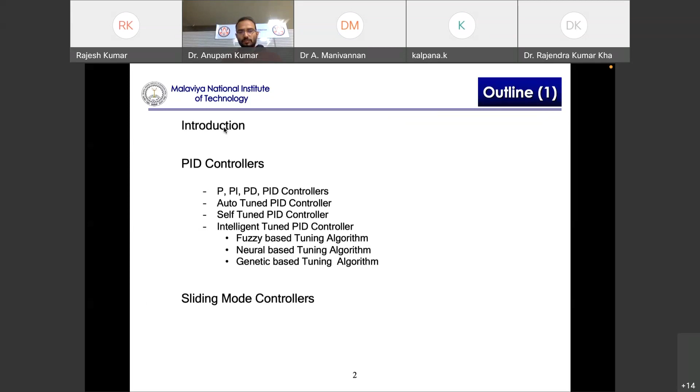Then another class is known as sliding mode controller—a small discussion on that, what control laws are and how it works. And then we discuss in detail about fuzzy controllers.

We talk about the structure of fuzzy controllers, fuzzy PI-PD, PID-like controllers, adaptive fuzzy controllers, and the main factors important when designing fuzzy controllers, like scaling factors and membership functions. If you have membership functions, we subcategorize them into symmetrical or unsymmetrical membership functions.

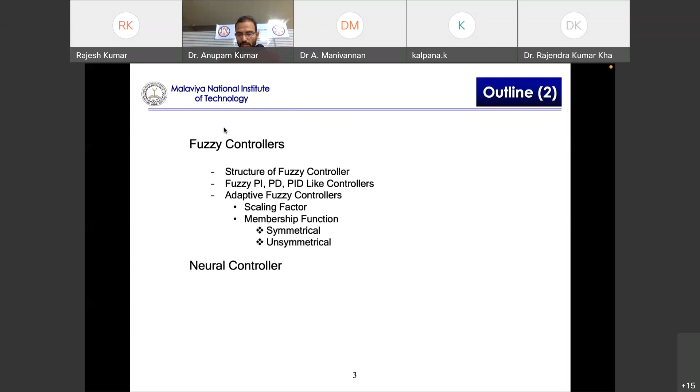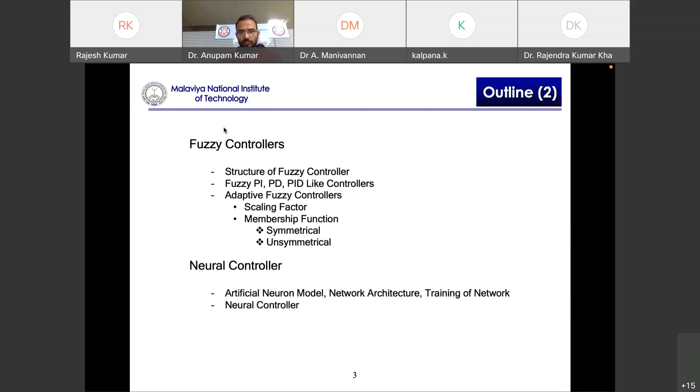Then we will discuss neural controllers, what they are, and most of you are aware of it, but just to check, how we can use ANN or ANN architectures for control purposes. We'll discuss neural controllers, online neural controllers, or offline neural controllers.

And then some advancements where we are mixing the two controllers—mixing the properties of fuzzy and neuro.

Each one is having its own kind of advantage and disadvantage. So if we mix them, if we combine them, can we compensate the disadvantage of one by adding the second type of controller? So there we talk about, we'll try to understand fuzzy neuron, what it is, what is neurofuzzy, and what's the difference if I switch these two terms, fuzzy neuro or neurofuzzy, how does it make a difference in the controller.

Then adaptive neurofuzzy system controller, again we'll discuss about symmetrical and unsymmetrical controllers there. And then at the end we'll see how, if you develop any controller, you can check the performance of these controllers, like which one is good. So if you want to claim that you have developed a certain kind of controller for a certain application and your controller is better, how can you put it on record that your controller is better, what are those parameters.

So we'll talk about transient and steady state analysis with different conditions, and then finally we conclude over these controllers. So this is the flow of today's presentation.

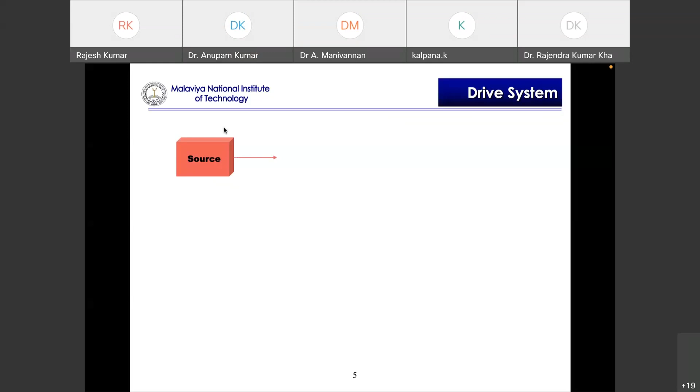So we need a source to power it up. The source is basically an uncontrolled kind of source, like we have some constant source there. Then we need a power modulator which modulates our source according to our requirement. Say maybe your source is DC, but I need AC, so it converts DC to AC, or likewise.

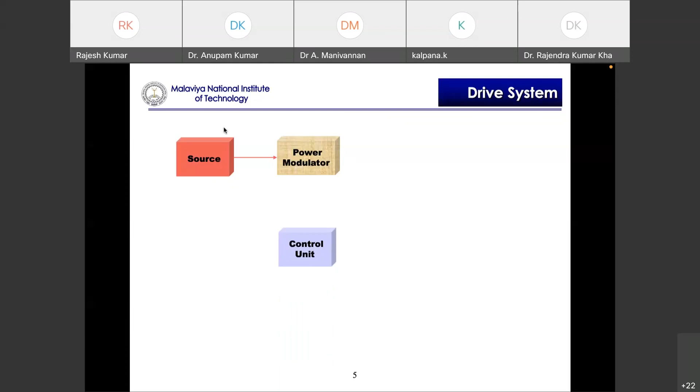And since you are using a power modulator, you need a control unit. So the control unit basically controls that modulator, the processing of it. And here comes the controllers. The controllers are part of this control unit. So we give a reference trajectory that says, okay, this is what I want from my system.

Maybe if it is a robotic problem, I'll give that reference signal or reference trajectory that the angle at that instant should be 30 degrees. So that reference signal goes to the control unit. The control unit, based upon this reference signal and feedback, generates some signal. That signal moves to the power modulator, which modulates the power, and that modulated power moves to the motor, and the motor then rotates according to that.

And we have a feedback mechanism. We sense it and give a feedback to my control signal, so the control signal always works on the feedback system, feedback mechanism. So control system always works on the feedback. It will have a feedback from the system, how the system is behaving.

It can be any process. This one is one kind of application, but it can be of any process, maybe any industry process, and most of these processes are control processes, closed loop control processes. So this one is the feedback, and this one is the reference signal, and here is the controller. So the job of the controller is to force the whole process according to our requirement, according to our desired outputs. That is the job of this particular section.

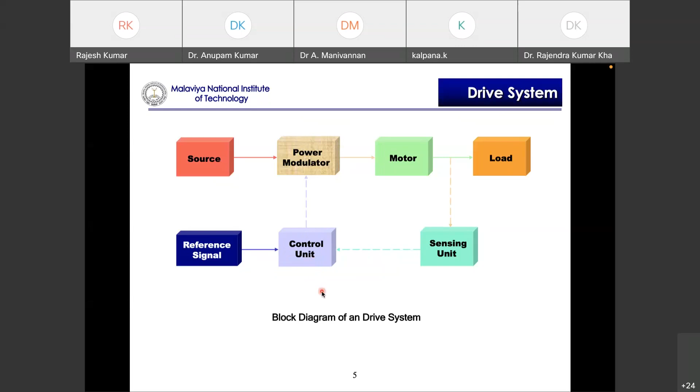So this one is a diagram of any drive system, maybe as I told you, electric drive or mechatronic drive system or robotic drive system or something like that. So when we are talking about today's topic, our focus will be on this part. Let me highlight it. So our focus is on this part, that is the control unit, because most of the other things are physical structures which are there. So we need to develop a certain kind of unit here which controls the whole process.

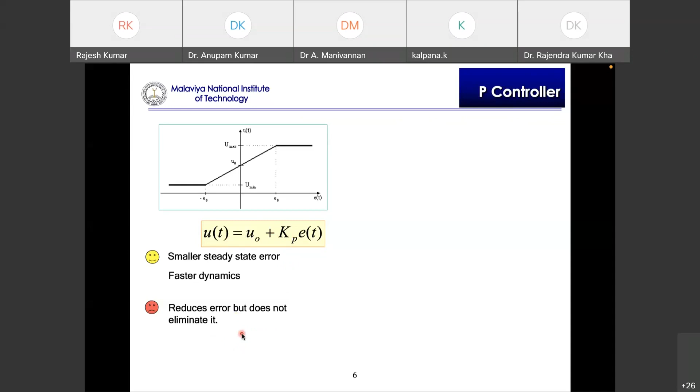So this is just to justify that theory. I have simulated these things, and if you see the graphs, the desired value is 1. That means I want to rotate my motor with an angle of 1 degree, or if you're looking at motion, I want to run my machine at 1 pu, per unit scale. 1 pu is basically, say, a maximum of 1000 rpm, something like that. So you can see the response of the system.

So if KP is 2, you can see there is a large gap in the steady state operation. Say at 2.5 there is a large gap. I want 1, but it is settling somewhere around 0.65 or something. But as you keep increasing your KP, you can see that this error keeps reducing. That is what we have in our comment box also: if you increase the KP it reduces, but you cannot eliminate it. So this is the first basic type of controller from where people started.

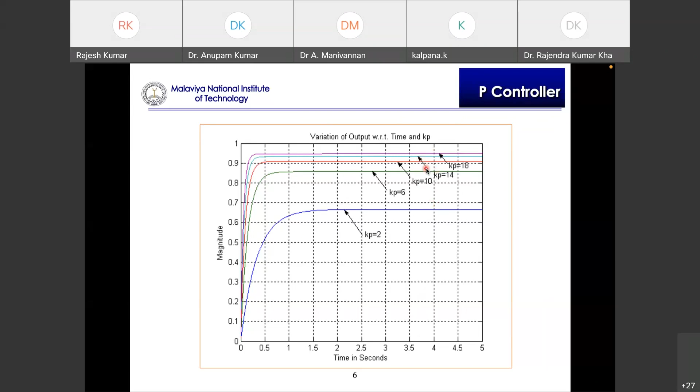This is pure mathematics, and those mathematical things are programmed in a nice manner. The next one is the PI controller. So I controller is basically an integral controller. You can see the equation is now modified. There is one term, E of t, which is already there in proportional, plus another term being added here. What we are doing here is taking the integral of error. Now I have two terms: one is Kp into Et, this is the P controller, and another is Kp by Ti into the integral term, this is known as integral. When you combine these two, that makes the PI controller. Now you are integrating the errors, and based upon those you are generating the output.

If you do so, this is control system analysis, where we can talk about stabilizing and destabilizing effects and the transfer function. That's not a major agenda here, but let's check how it is working and what are the advantages and disadvantages. The advantage is that now your steady state error can be 0, because you have added the integral term to it.

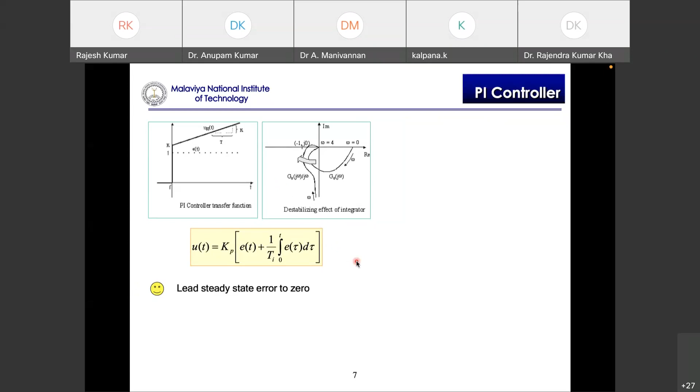Earlier controller was suffering from steady state error—you cannot eliminate it. But here you can eliminate the error. And then the negative point is basically stability. So these are control system approaches.

You can check it: your graph is moving towards -1 plus j0, and then we have a destabilizing effect. And obviously, this one is creating an issue over stability. I'll show you on the graph how we can judge and comment on this if we have graphs in front of us.

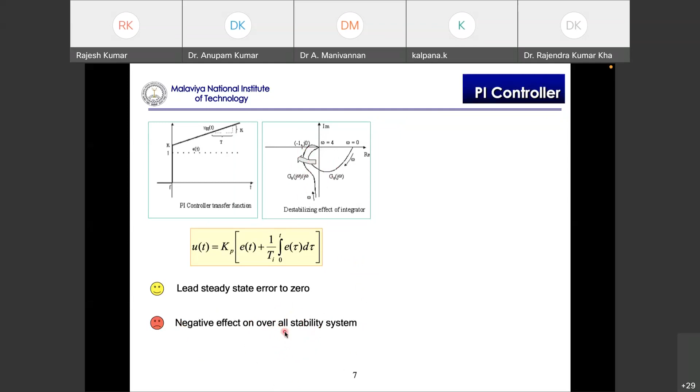Anyway, it is going and trying to reach to 1, but it will take a lot of time to reach. In general, or in practical, we don't want our system to respond so slowly.

It's like, okay, if I am working on a robot which is being used to operate a patient in a hospital, what I want is as soon as I give a command that, okay, rotate 30 degrees, it goes to 30 degrees and then performs the operation. We never want that robot to take 10 to 20 minutes to reach 30 degrees and then perform it. Then the patient will be in danger and all those things will be there.

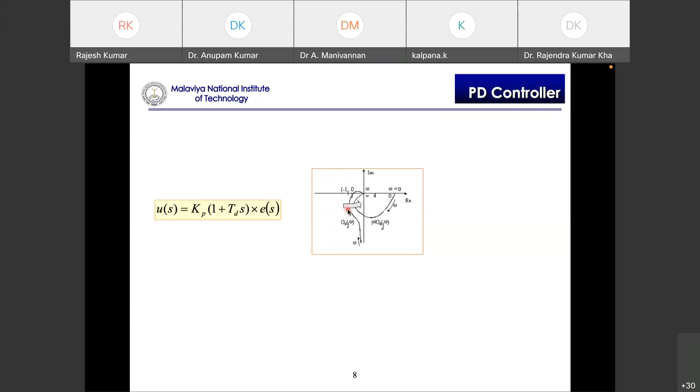So this is the output, and if you use it, you can see it is the reverse of the earlier one. Earlier it had a destabilizing effect; this one has a stabilizing effect. So this one is good. What is good here is it avoids sudden change in the error signal, and it improves the stability of the system.

PI moves towards the destabilizing zone. PD improves the stability of the system. Okay, and then...

The issue with this one is because the derivative means the change in the signal—derivative means xn minus xn minus 1, and that is being added to the system. So if there is noise in the system, it amplifies the noise. That is a big issue with this type of controller.

So each controller has some advantage and disadvantage, and also it cannot eliminate the error. It can reduce it, but it cannot eliminate the error.

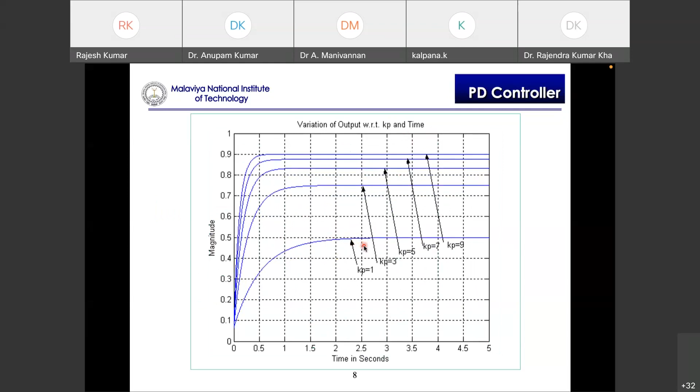So these are the various graphs that can be achieved when KD is fixed and KP is varied. We need to see the impact of fixing one parameter and changing another. KD means KP into TD, and KP itself is KP. So what is the impact on the performance if I fix that one and vary the KD?

So the change occurs in the transient part. This is my transient part, and this is steady state. If you see the steady state, n minus 1 is 0, so there is no effect here basically. Derivative term here is 0 because it's a constant kind of line.

So I now have three things with me: P, PI, and PD. P is okay, it's very fast, but steady state error cannot be 0. PI is a good one, it makes steady state error 0, but it introduces stability issues. PD is okay, it amplifies the noise, but it stabilizes the thing. So each one has advantage and disadvantage.

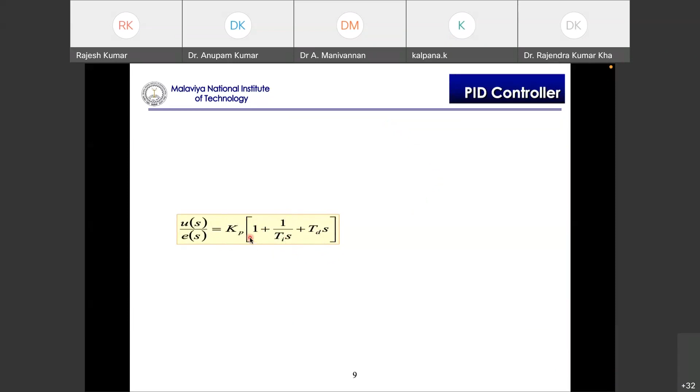Now each one has something good, something bad. You can make combinations of these three values, KP, KI, KD, to achieve it. Because if you increase KI, your oscillations increase, so we don't want oscillations.

Oscillations mean, okay, I give a command to my robot to move 30 degrees, and what happens is it moves and then starts oscillating around 30 degrees, somewhere going 31 to 29 and keeps on oscillating, which is not required. I want it to go to 30 degrees and remain at 30 degrees.

So if I give a certain command and my tuning is not proper, what are the issues? One issue can be that it moves and never reaches 30 degrees, settling somewhere around 28 - it moves very fast but never reaches there. That is basically your first part, your KP is good so it moves fast but never reaches there.

Then when KI is also introduced, it reaches 30 degrees but starts oscillating between 31 and 29. Then you can tune your KD in such a way that you can reduce the oscillation. So changing these values of KP, KI and KD is known as the tuning of the parameters.

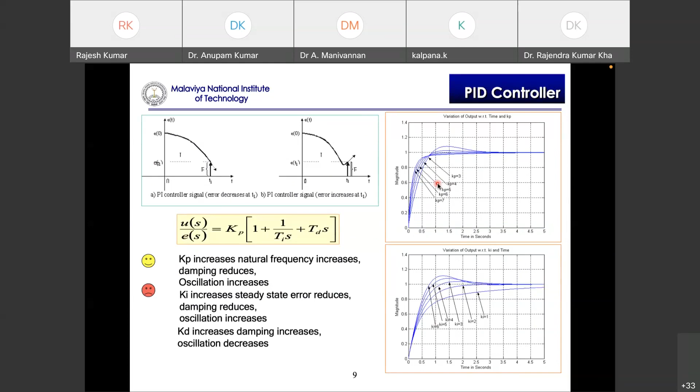KP is simply KP, KI is KP by TI, and KD is KP into TD. So how to get it? Getting the best values of KP, KI and KD for the performance of your system is known as tuning of parameters. So these are the parameters of a controller, conventional PID controller.

So this one is one method which is the classical method, an old one. What people do is they use the Ziegler-Nichols closed loop method. In this method, they take any system and oscillate the system. From there, they calculate the period of oscillation and ultimate gain.

And from there, they try to calculate the parameters of PID if you're using PID, PI, or P. But this is not a good idea, in the sense that if I'm using a controller in a big huge process, or say in a robot, nobody allows me to oscillate the system. So how to do these jobs there?

Another issue is that with time, my parameters are changing. If the parameters of the system are changing, obviously the transfer function is changing, and then I need to do some oscillations again to calculate these parameters and all this. So there are many other issues related to this one.

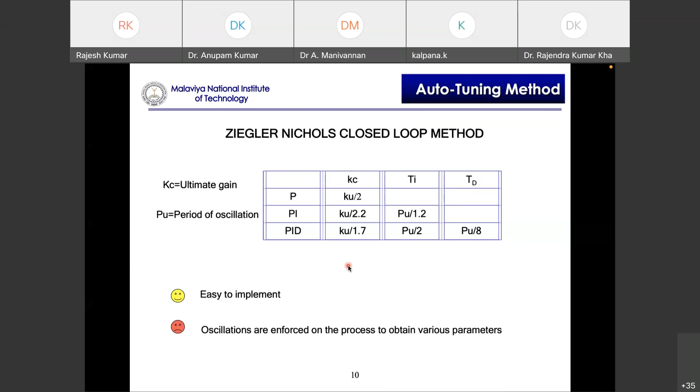This is very easy to implement, but you need to force oscillations on the system, and that creates a problem. So people thought, why not develop an algorithm so we can make it self-tuning instead of giving oscillations.

So self-tuning is one way. They change your KP, KI and KD by some mathematical relation. I measure error from here, I measure the performance of PID from here, and these two inputs I pass to the algorithm, which calculates KP, KI and KD, and those values can be given to the plant.

So in one sense we get rid of assuming or getting the values of KP, KI, KD. But now they depend on other parameters, which you can see here, alpha and beta. So again, to get the optimal value, we need to tune these parameters - what should be the value of alpha and beta.

But the working of this algorithm - here alpha and beta are also functions of time, they are also changing. So when we work with this type of system, this is online self-tuning. There's no need to do oscillations and all that stuff.

It works automatically. Error is coming from here, performance output of PID is coming from here. Those things come here, and then they can be used to find out the values of PID.

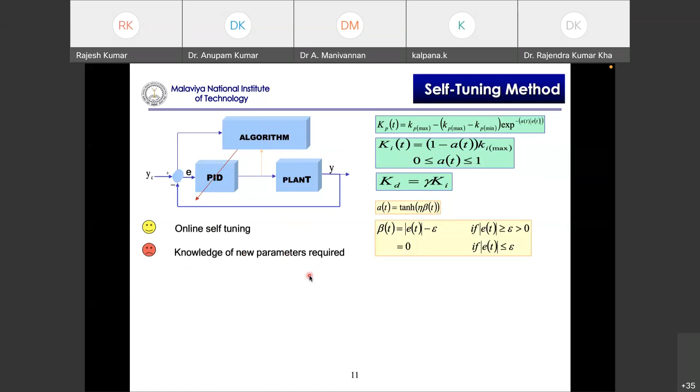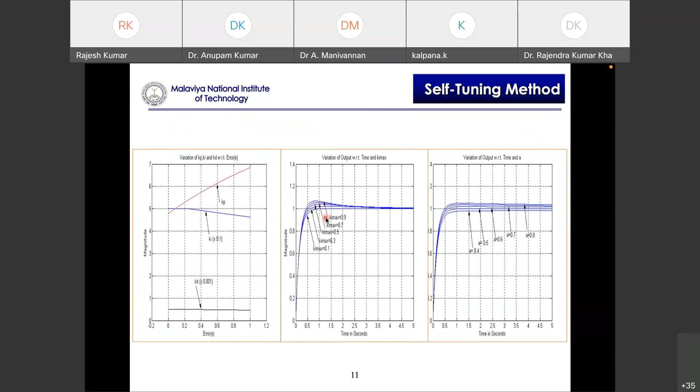But now again, a new thing appears - we have new terms, like alpha here, beta here, efficiency requirements. So we need knowledge of new parameters, which is sometimes a difficult task. And these are the performance of those self-tuning PID controllers - not very interesting or impressive, but in some cases it works fine.

Then people thought, instead of using that mathematical algorithm, can we use a fuzzy algorithm here? What fuzzy is, I'll explain in later slides, but just understand how it can be used here. They take the inputs as error, pass it to the fuzzy environment, and this fuzzy environment generates output signals. Those signals are used to tune the parameters of PID.

This is not a fuzzy controller. Here we are using a fuzzy method, inference system, fuzzy calculation or fuzzy set theory to tune the parameters of PID.

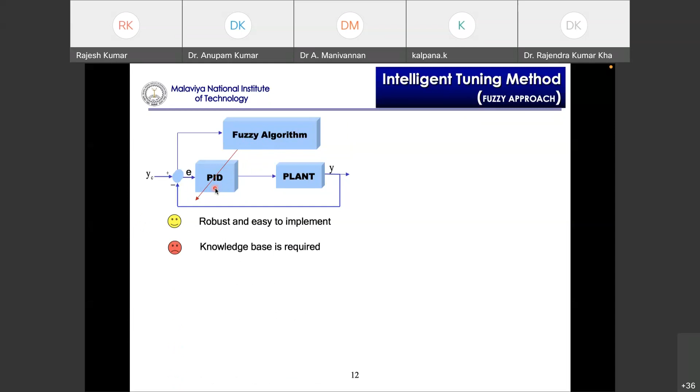It is robust and easy to implement, but there is a drawback - a knowledge base is required, which is one of the major requirements when developing any fuzzy algorithm. But the performance is very good.

So every instant they get the value of error and change in error. Based upon that, the fuzzy algorithm is generating the value of KP, KI, and KD, and those values are then being used to control the plant.

If you try to plot the values, you can see error and change in error, and this is KP, this is KI and KD. You can see that they are moving very fast - this is the variation in KP, KI and KD, and this variation comes in real time.

We are getting the input, calculating the error and change in error, and it's moving to the fuzzy system, and at every instant it is generating certain outputs - three outputs, KP, KI, and KD - and they are given to the system. So this is intelligent tuning of your controller.

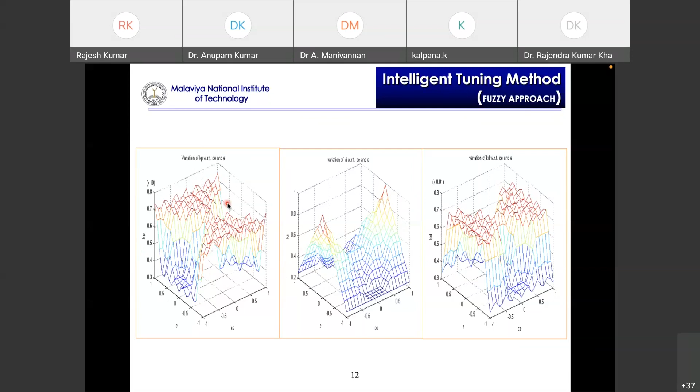So another one, we are just keep on checking what are the working and procedures of various controllers. Another one is we can use neural algorithm to tune the parameter.

So for neural, you can see here now there is some change. We are taking the input, what is desired, and we are taking what we are getting, and then we are using neural algorithm to tune the parameters of PID. Now there is a difference between this and the earlier approach.

In fuzzy, we take the error and change in error as inputs, and it generates a certain output. Now in neural algorithm, the errors are what is desired and what the system is getting. We try to map how better y can be same as yc, and then to do that we try to find out the parameters of PID.

What is the advantage of using such type of approach? The advantage is we can accommodate poorly modeled systems. If my system is poorly modeled, and if it is nonlinear, a dynamic system, we can use the power of neural network, which is basically approximations and all those things which we are already aware of. So that power is being used here. So if my system is poorly modeled and dynamic in nature, this type of tuning works fine.

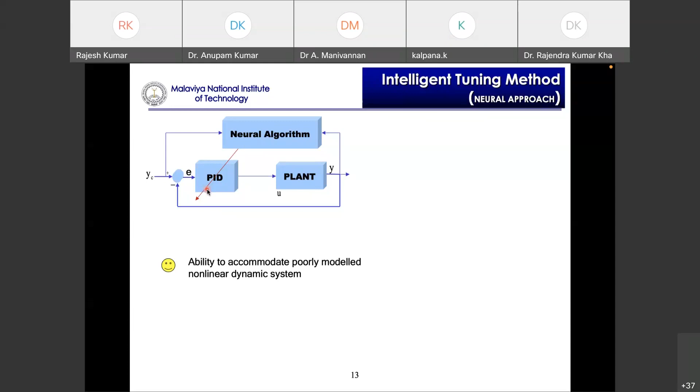But if you want to do the tuning, you need input output data pattern. So either you have a pattern of that system already which is being used, or you need to see how to get that pattern so that I can train my neural network.

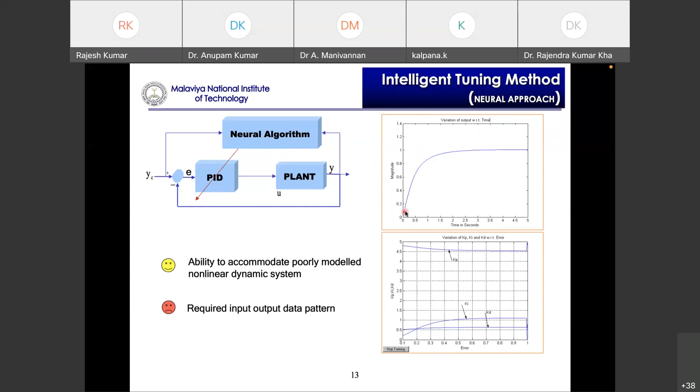So this one is the performance of the system. Again, it is settling at 1, very good, and the response is okay. This curve depends upon the data which we have received. We have simulated it, and we have synthetic data, and on the basis of that we try to train it and then use it. If my data is much better, then a better performance curve can be achieved from there.

The third one is just giving an idea, that is basically a genetic approach. So here, this opens another class of intelligence, which is inspired from nature or species. So we can say meta-heuristic algorithms, or bio-inspired algorithms, or nature-inspired algorithms. So these are the optimization algorithms.

So here what we are doing is making some change in the structure. And what is the change? The change is that I take some parameter of my controller performance as my objective function, and then I try to achieve that objective function, either maximizing something or minimizing something, by varying certain variables.

So variables are known to me, in the sense that I know the variables, but the exact values are not known to me. The objective function can be anything, like minimize the steady state error can be an objective function. Another objective function is minimize your peak. Another objective function is increase the stability of the system.

So there can be any kind of objective function, and to achieve that objective function, we can use classical optimization approach. But if we consider my system is highly nonlinear and dynamic, then classical approach fails there. And then people suggested why not go for meta-heuristic or similar kind of approaches. So this one is one of them.

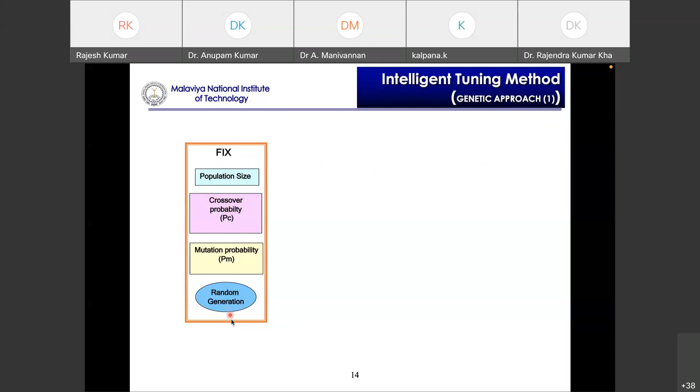So in genetic algorithm, in a simple way, we fix a few things: how much is my population, what is the crossover probability, what is the mutation probability, and we generate the random array, generate the population. And once we have this with us, then we do the encoding part. We have the fitness function, and we have these three operations: mating pool, crossover, and mutation. And then we decode it.

So the process goes like this: we fix these things, we encode the parameters, we calculate the fitness function, we perform these operators, and it keeps on running till a certain level of accuracy is achieved, and then finally we decode it, and that is passed to the controller. So controller values are there.

So this is the whole flow, and this remains the same, meaning you just change this approach. Instead of fixing population size, crossover, or mutation, you can fix population size, and then C1, C2.

and omega. Rest things work here, and in the operators we can have the updation of velocity, and then decode it. So this will be tuning using the PSO approach.

In another case, you can fix the number of wolves, and then fix the parameters A1 and A2 and C1, and these operators update the position. Then it will be PID tuning using GWO.

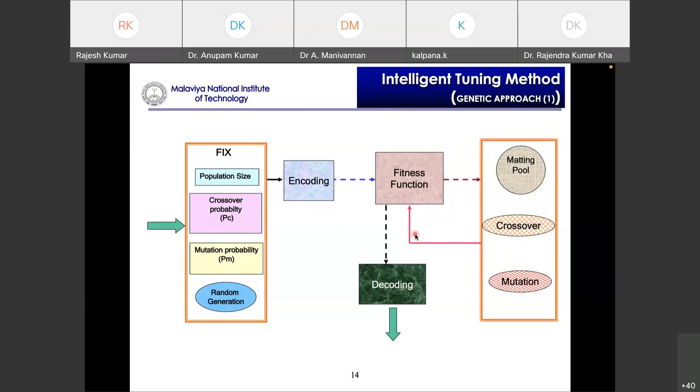So this one is how it works. For those who are not aware of it, in a very small, fast way, I'll try to explain it.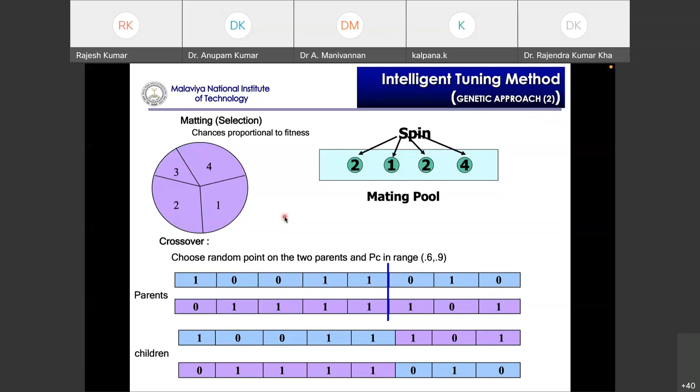Mutation can be done like we swap any particular value there. Swap means we change it - if it is 0, we make it 1; if it is 1, we make it 0. What we are doing is in binary, so in binary we do it like this. This one is known as mutation.

We perform the mutation to ensure that we are not trapped in local solutions. We are looking for a global solution. So just to avoid the local solutions, we perform mutations.

And once this whole process is complete, we have new solutions, and those new solutions will give us new values of PID, and those values of PID we again pass to the system like this. So this is how the genetic algorithm works.

It provides a good response for any system without any knowledge of the mathematical model, and that's a good part of the system. But it is a complex algorithm, and the disadvantage with this one is it is

a probabilistic algorithm. It works on the theory of using probability. Since it is heuristic in nature, there is randomness everywhere - randomness in the starting point, randomness in the crossover and the mutations, and likewise.

So what happens is that every time you run genetic algorithm on the same problem 1,000 times, it will generate 1,000 different answers. So there is randomness in the solution. So then which solution is better? That is again a challenge if you want to implement it real time.

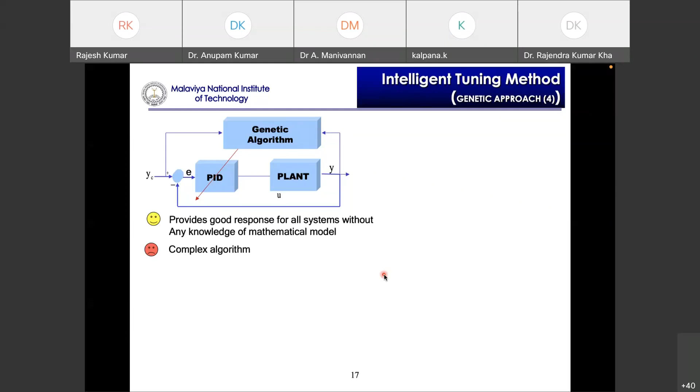These are the performances which I will try to analyze. We have different publications out of it. What we are trying to analyze is what is the variation in KP and KD if I move my two probabilities, crossover probability PC and mutation probability PM.

So what is the impact on my gains if I vary my probabilities there, and then you can have a response of the system. Similarly, you can apply more research in this area. If you have system equations and you're using a PID controller, to tune your PID controller you can use any type of meta-heuristic algorithm, and then study the impact of changing the parameters of that algorithm.

Study the impact on the performance and the parameters of the controller, and once you know that effect of the algorithm's parameters on the controller, you can analyze what is the impact of the controller's parameters on the system performance, and finally conclude what is the best combination. So this is another domain or area which can be used to tune the parameters of a PID controller.

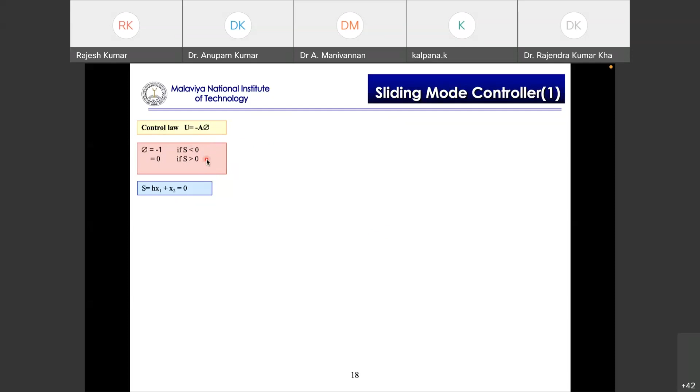These are developed based on a certain kind of mathematically driven relation rather than a data driven relation. So here u is minus a phi, and we design it in this fashion. Not the major agenda, but I just want to give you some insight on this one.

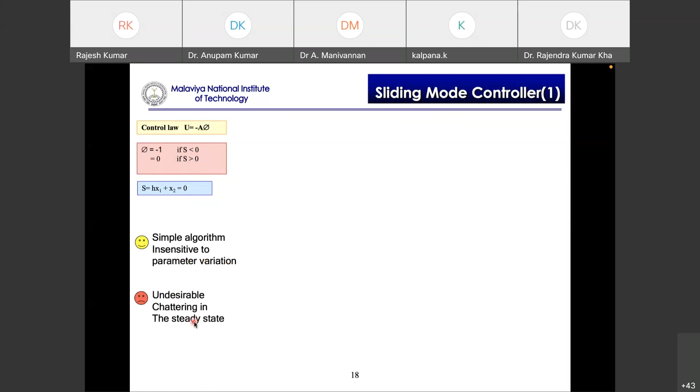So it's a simple algorithm, and it is insensitive to parameter variations. What is the issue with this one? Since we are switching here, if s is less than 0 it's minus 1, if s is greater than 0 it is 0. There is a chattering. So I'll show in the graph what is chattering there.

You can see there is chattering here. These are not oscillations, but some vibrations in the performance of the system. If I vary these gains, certain chattering appears in the system. If I zoom in, you can see this is known as chattering. The system is reaching very fast to 0.99, but around 0.99 it has certain indifferent behavior, and that is basically an issue of a sliding mode controller.

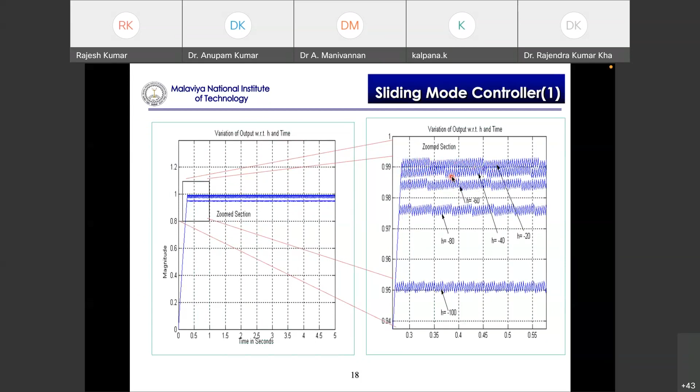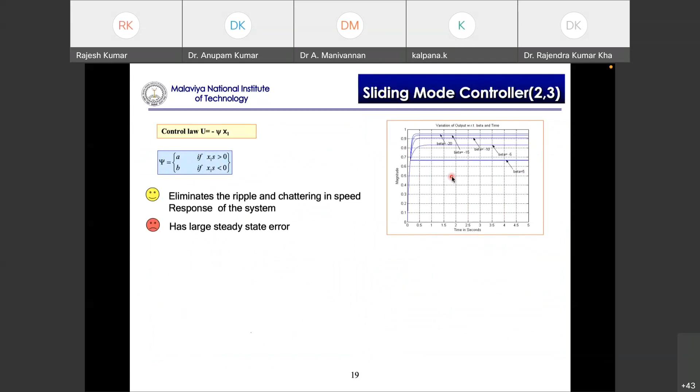Then people modified this law. This new law eliminates the chattering better, but it has a large steady state error - you can see it is not settling, not reaching 1. Then they combined the two laws, the earlier one and this one. So the new combined law reduces both the steady state error and the chattering.

This is how people are working on these things. People then again modify the control laws to generate a better, faster response. You can see here the response is now fast and it is reaching to 1, stabilizing, with no chattering, no oscillations, and the system is behaving very nicely.

So all these methods, like PID and sliding mode controllers, are derived based on certain models, physical equations converted into mathematical form. But all these models have issues related to various gains, and these gains can be tuned by conventional approaches, or we can use approaches taken from intelligence, which we can call intelligent tuned controllers. Here also, like sliding mode, we have gains. So how to get the optimal or best gain here?

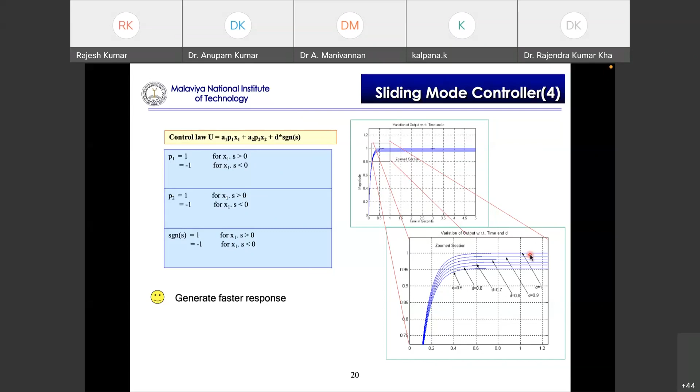We have done certain analysis, varying d, and finally we reach that if d is 1, there is no steady state error. But can we think of any auto-tuning of these parameters? And when we say auto-tuning, we have to use all those techniques which we discussed earlier. So now the next important and very popular, stabilized category is fuzzy controllers. Just one second.

Okay, so here what we are doing is this controller is designed on the basis of a few things. One is the knowledge you have, what are the reasoning, how you are designing the reasoning of your whole process, and it is not basically purely model based. It totally depends upon the knowledge as well as the thinking, human thinking.

And what the good part is, they are very simple and easy to understand and implement, and they are not very expensive also. And a lot of applications are already there which authenticate that these are good controllers, and now this is a well established technology and being used there.

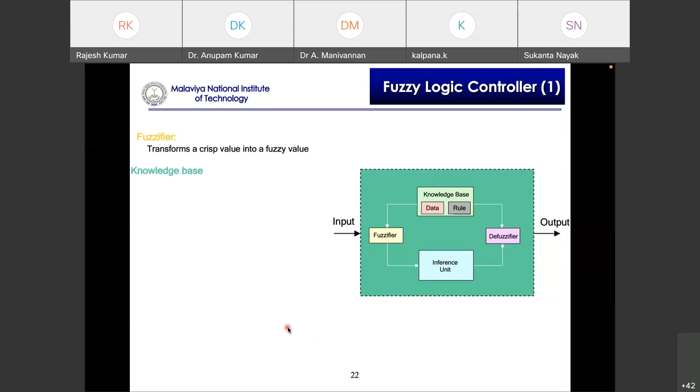Just let's define the term so that we can talk later. Knowledge base basically consists of two things, and we develop certain rules based upon the data we have. That is knowledge base.

Most of you are aware, but if not: when I am driving a car, I take a decision on how much brakes I have to apply based upon how fast I am going, and then how near the object is to me. Based upon those two, I make a certain kind of decision.

So I have certain kind of data with me, earlier data, and then I develop a rule that if the object is very near and I am very fast, I have to apply very high brakes. So that is basically the knowledge I have. The more I perform on the system, the more knowledge I have, because I have more data and I can refine my rules also there. So data means all the information here.

Data is basically membership functions, scaling factors, and all these things, because those are required in developing the controllers there. In the rule base, based upon this, we develop a certain kind of rule.

And then there is an inference unit, because from the rules it gives me certain kind of information, and that information I use to conclude over a certain thing. So that is the job done by the inference unit.

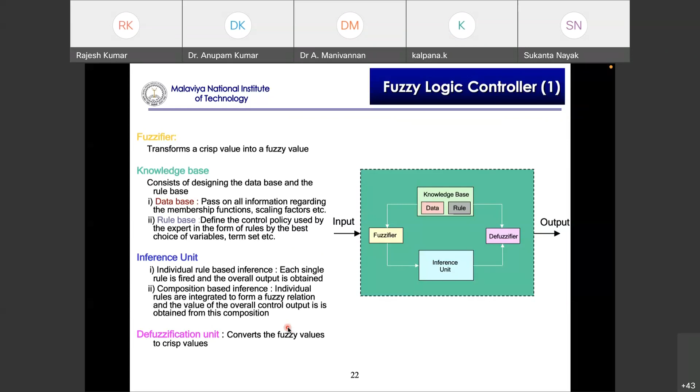And then from there we can have defuzzification, because the real world does not understand what is belongingness and fuzzy set. So we have to give the crisp output, so it converts back. So these are the few steps which are being used in fuzzy logic controllers.

So how does it work? Let's understand with this one how it works there. So this one is my fuzzifier. What is happening in the fuzzifier? I have two inputs basically.

So the fuzzy logic controller, one input going in is your error - what is the error between your desired value and what the system is generating? So that is E. And the second one is CE, that is the change in error. How much is the change in error? Because that is very important, as it controls the dynamics of the system also.

And then, okay, this one is basically certain kind of membership functions. So this one is a membership function, which is taken as a triangular shape here. And what happens is this error cuts some membership functions. So this one is one membership function, and it cuts at a certain value, say 0.8. What is the meaning of this? This membership function represents a certain set.

The name of the set is NS, that is negative small. So it cuts here, and we check how much this value is. This value is 0.8, representing that this error is having 80% belongingness to this set. That is the difference between fuzzy set and crisp set.

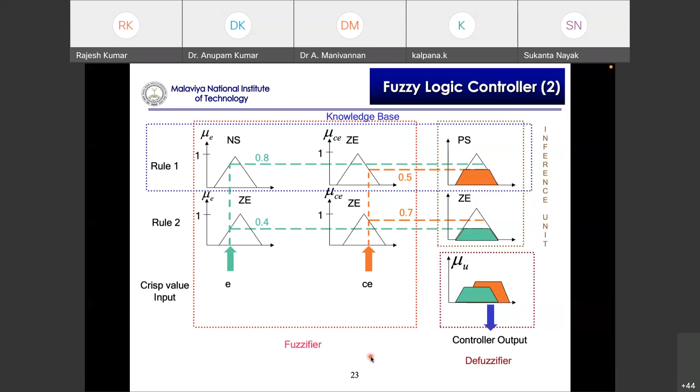There are a lot of things present there, but our agenda is to discuss more on the controller, not on how fuzzy calculations work, that needs a different kind of explanation, maybe another professor will explain those fuzzy calculations. If you have queries, I'll keep the last 20 minutes or so for discussion on that part. But let's understand the fuzzy controllers.

So the fuzzy controllers can be taken from here, and the first fuzzy controller is like a PI controller, meaning a fuzzy controller which behaves like a PI controller.

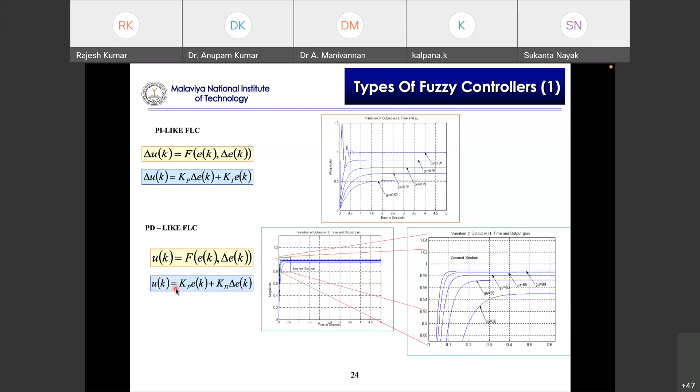Now when I change my inputs, instead of taking the inputs and output relation like before, I've done some change here. Instead of taking output as delta u, I'm taking output as u. And if it is like this, then this one is same as your PD controller. If I try to plot this curve, you will find it behaves like a PD controller. So just by changing a few things, we need to be very careful when talking about fuzzy controllers. The inputs are same, but in one case I take the output as change in output, and that behaves like a PI controller. In another case, if I take my output as it is, that behaves as a PD controller. Many times this type of mistake happens. So this one is your PD controller.

And then if you do the input change, if you give input error, change in error, and sum of error to your controller, then the controller will behave like a PID controller.

Now you can see here, instead of giving delta ek, what I'm doing is delta u is a fuzzy function f of error, one step earlier, which can basically be taken as change in error, and then two steps earlier, which can be considered as a summation series kind of structure. So this one is like a PID controller. These are the screenshots taken from the fuzzy inference system available in MATLAB. Try to simulate it there. The behavior is like a PID controller.

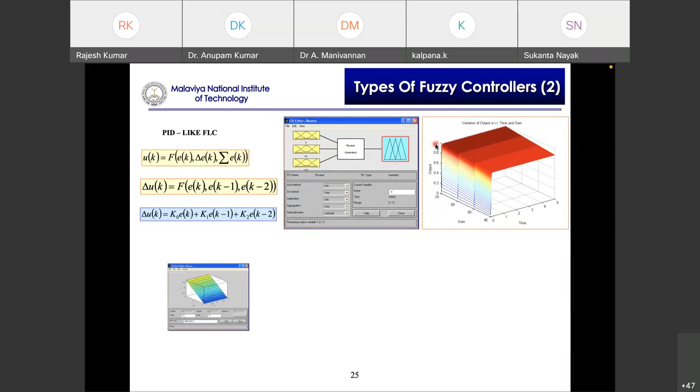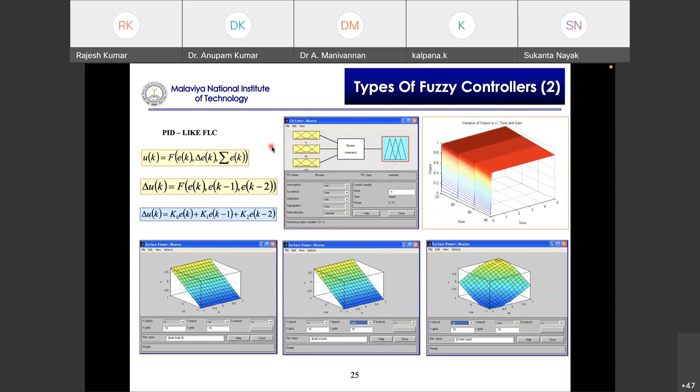So this is how you can make your fuzzy controller behave like a PI controller, PD controller, or a PID controller.

The issues are there, and again, some tuning is required in fuzzy controllers too. It is not like we don't need any tuning in fuzzy controllers. One kind of tuning is adjustment of parameters, and we can do it two ways: either we do some scaling of inputs and outputs, or we do some kind of operations on fuzzy memberships.

What I'm assuming right now is you are much aware of all these terminologies, membership functions and types of membership functions and all these things. If not, then we can have a discussion in the query section.

So we monitor the things, what are the changes. We process, monitor, sense the changes taking place in the process characteristics. So we can make it like this. We have a fuzzy controller. We sense what changes are occurring, but depending upon the input only, we can make the tuning here.

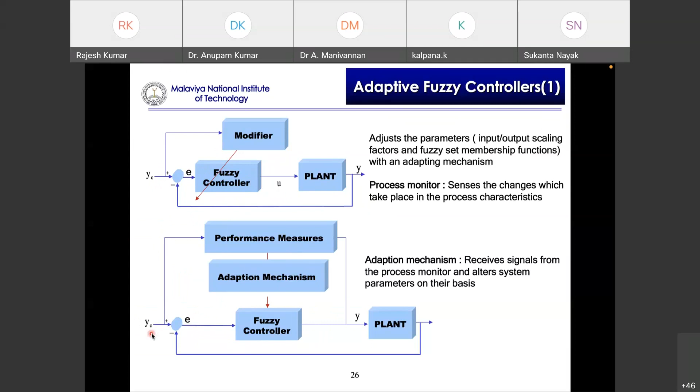And we can do the changing process two ways. Either we sense the change taking place and then modify it, or we receive a signal from the process monitor and alter the system parameter depending upon how you are considering it. So we have two structures. One structure is just sensing the changes happening and modifying the control parameter. Second, you take the input, sense the changes, take the output of the controller also, measure certain parameters, adopt some adaptation mechanism, and that adaptation mechanism changes your controller parameters. So we have two types of topology, both coming under the category of adaptive fuzzy control. This one is one kind of adaptation, this one is another kind of adaptation.

This is not working. Okay, so adaptation mechanism and scaling factors.

If I'm just varying my scaling factors, okay, I'm just changing the scaling factor. Scaling is done at two points: one is input scaling and another is output scaling. When we are passing an input to a controller, it is multiplied by a certain factor, that is the gain, basically, or scaling factor. That is input scaling, input gain. Output scaling is that when the output is generated by the controller, we multiply it by a certain gain.

So we have three gains: error and change-in-error gains when we are giving the inputs to the system, and the output gain.

So we have good and bad things which will happen. If we take a high value of gain related to error, it results in responsiveness of the system, that is low steady state error and rise time, but the stability is poor. If I take a high value of error gain and change-in-error gain, it gives fast convergence. If I take a low value of output gain, it increases the rise time and integral square error.

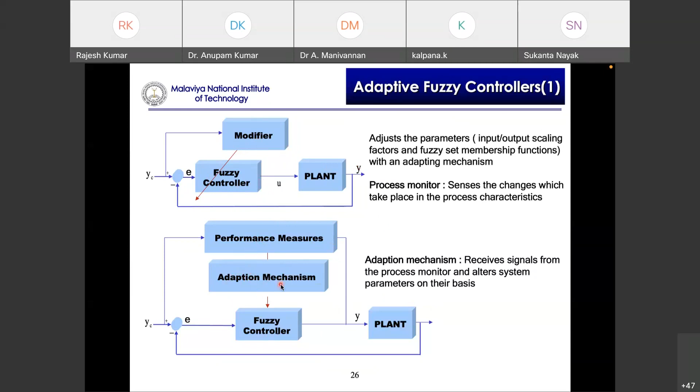And here what we are doing is controlling the scaling factors, varying the scaling factors so that we can reach this outcome. So we have one approach, this one we just modify. The second approach is this one, which is much better: you set your performance measures and then follow a certain kind of adaptation mechanism. In this case, we are adapting by using scaling factors. So this is one way of doing this. The second way is by playing with the membership functions.

So can we have all those things—process monitor and performance measure? In the earlier slide, what I showed you is that I achieve my performance by varying my scaling factors. In this case, I've changed it—I'm not varying my scaling factors. What I'm doing here is changing my membership functions. And that is very interesting, and I'll explain to you where the idea comes from and how it behaves that way.

This is a screenshot I have taken so I can show you. Initially, when I divide my whole space for error in the range of -1 to 1, I decided there will be 7 membership functions, because when my machine or robot starts, at that instant the error is maximum, because the robot is at angle 0.

I want to rotate it 30°, so that is the maximum error. When I pass the command, it keeps on reducing. So this is the error range -1 to 1, and this is maximum initially. But with time, this error keeps on reducing, and finally it has to be 0 error. So if after certain time my error is -0.4, or say -0.2, then there's no use of a1 and a2 as such, because they are out.

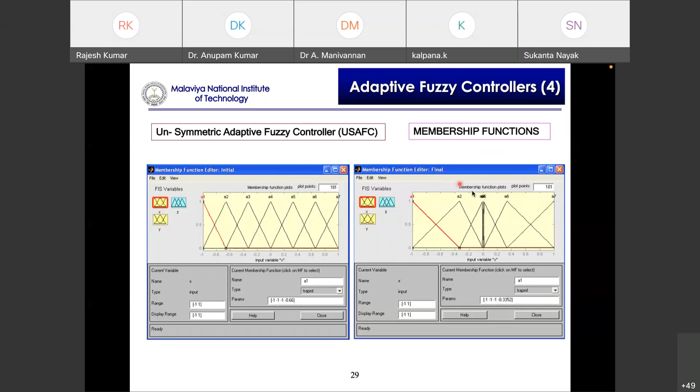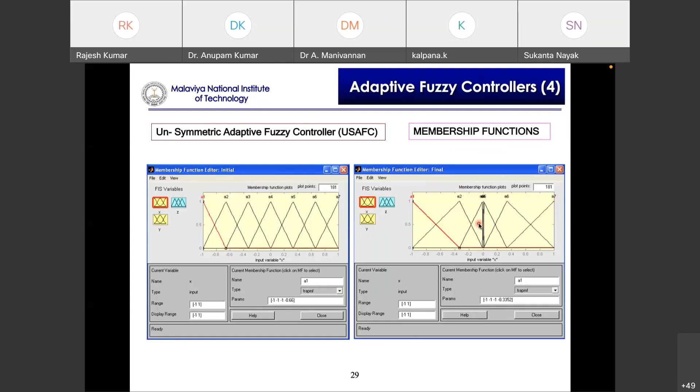Here it is 7. This one is initial, and this one is the final, on the right hand side. So finally we have again 7, but you can see the shape changes, because here we are changing the membership functions. When you do so, you get a different kind of rule base, a different kind of surface, and then different kind of performance. We have observed that for lower gain values, we have some overshoot also. But this is one kind of experiment I have done to see the effect there.

We'll discuss those parts later. So these are the two, two, three - these are two different categories when we are changing our membership functions, changing the shape of our membership functions. We can have more analysis on the types of membership functions and likewise, and some kind of hybrid combinations also. But this is how you can make it adaptive. Now these changes are automatic, meaning we are not doing anything manually - based upon your error and change in error, it is being done there.

Okay, so this is one kind of controller. There is another kind of controller which is basically a neural controller. Moving a bit fast on this one.

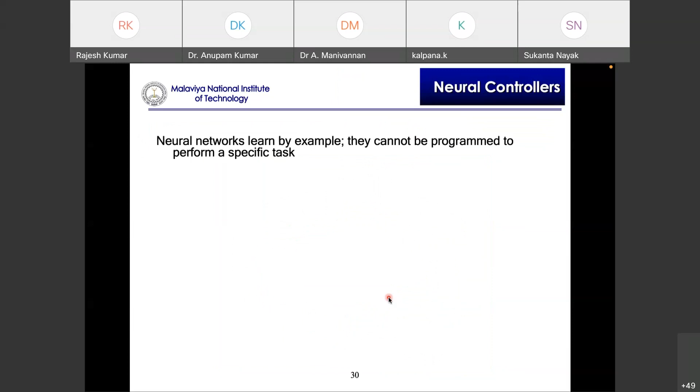We know how neural networks work. They are inspired from biological neurons. We have synaptic operations and somatic operations. The initial one is MCP, which can be designed like a neural controller. So we have input, output, weights and weighing factors. We train it, so there is a similarity. This one is MCP kind of.

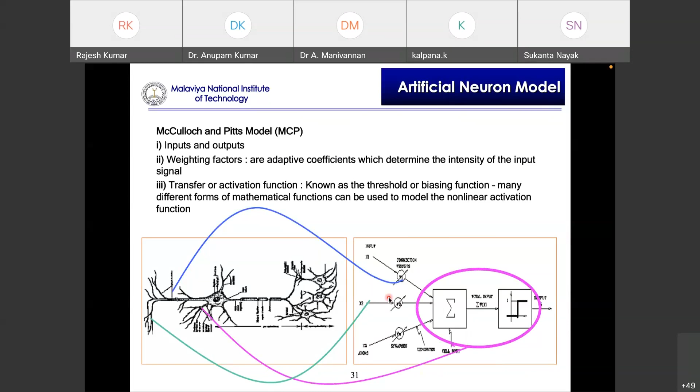We take inputs in a biological neuron, and here also we are taking input, but in this category of neural controller, the inputs are error and change in error. There also we have weighted or amplified signals. So here we have weights, then a summation sign, and a nonlinearity present in the system. So the structure is same as a neural network, and now this is being used to design any controller.

So what is the architecture arrangement of the neurons? We can have single layer and multi-layer, both can be used depending upon the complexity level you want to design for. If you want multi-layers, you can go for it to have different kinds of analysis on the structures. We have architecture based upon neural processing: feed forward and feedback networks, and unsupervised and supervised.

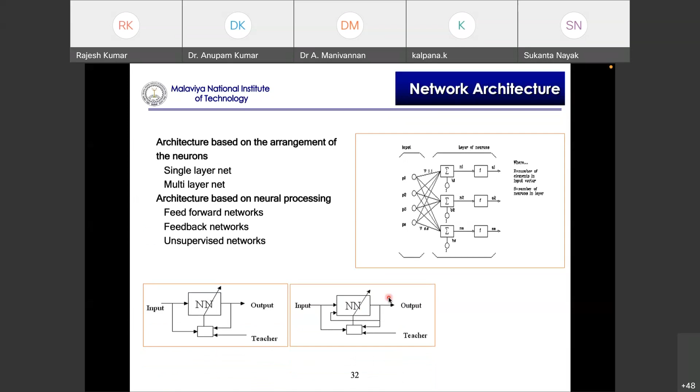This category is what we have studied in ML or neural network courses in undergrad or grad classes - the same theories can be used here. The only difference is the inputs are your error and change in error, and the output.

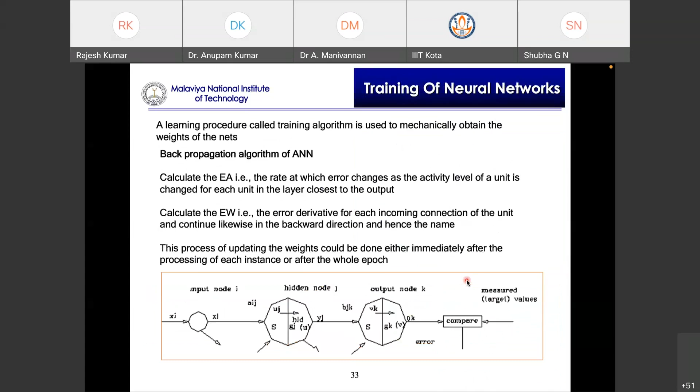And then we use back propagation to train our networks and all that, so I'm not going to repeat those things which are already familiar to you in neural networks.

But here we can have one kind of controller architecture which is in front of you. So I am taking a 3-input network - this is one of my neural controllers. One input is my error speed, what is the desired speed, the second is the speed error, and the third is the change in speed error. Based upon that, the architecture is designed.

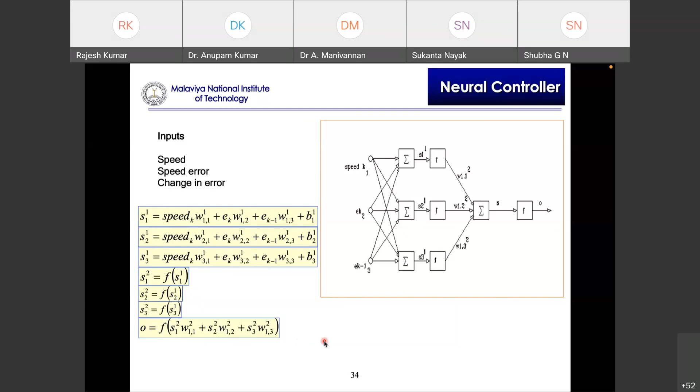We can take some kind of relations which change my learning rate, because in back propagation and all those structures we are aware of that. When you try to modify your weight, it is a function of the learning rate. So how can you make your learning rate adaptive?

Now, neural network has certain advantages and disadvantages, and fuzzy has an advantage and disadvantage. Advantage is it's robust, it is a more stable network controller. Disadvantage, it has certain zone of error also in neural network. The zone error is less, but at the same time we need good data to design a controller for a particular process. To understand more about the system, we must have a good number of data, so that we can have a better network.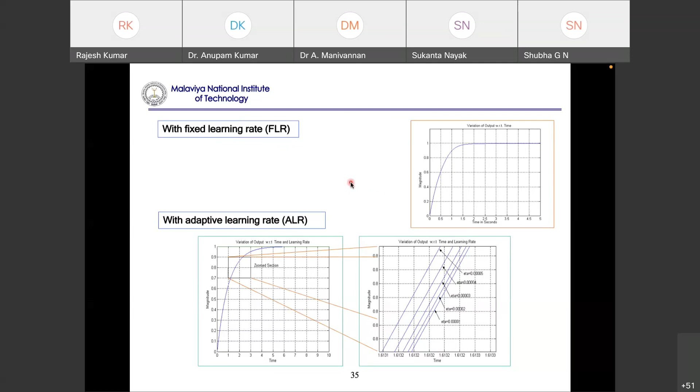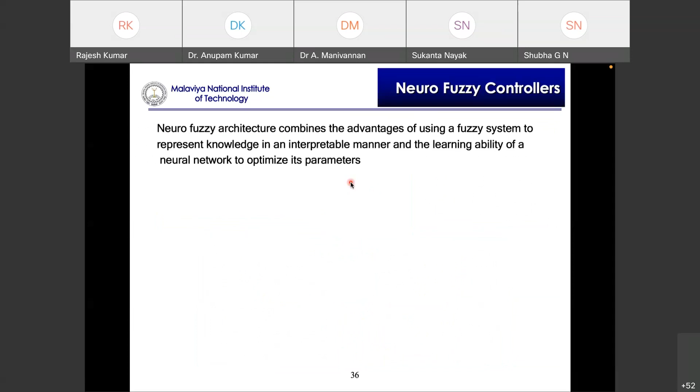So people try to make a combination of this, combining neuro and fuzzy, and from there neuro fuzzy architectures come into the picture. This uses the knowledge and the learning ability, and these two approaches are combined so that we can have better configurations. They are well suited for systems where user interaction in the model is desired, and at the same time we want to modify our network equations and mathematics.

There are two groups we need to understand very clearly. People get confused, sometimes one group is fuzzy neural networks, and another one is neuro fuzzy inference system. Just focus on which comes first: fuzzy neural network, and the other is neuro fuzzy system. Both come under the category of neuro fuzzy inference system, and here is the difference in front of you. This one is fuzzy neural network. Let me read out these things, because they are very important.

The characteristic of each synapse is represented by a nonlinear function, and the aggregation of synaptic is done by an algebraic sum. In this structure, if you watch it carefully, we have inputs, then in neural network we have weights here, and they are summed up. Now in this case, the weights are no more weights, they are functions basically, and these are fuzzy functions. So if you have an architecture like a neural network whose weights are like fuzzy functions, that network is known as fuzzy neural network.

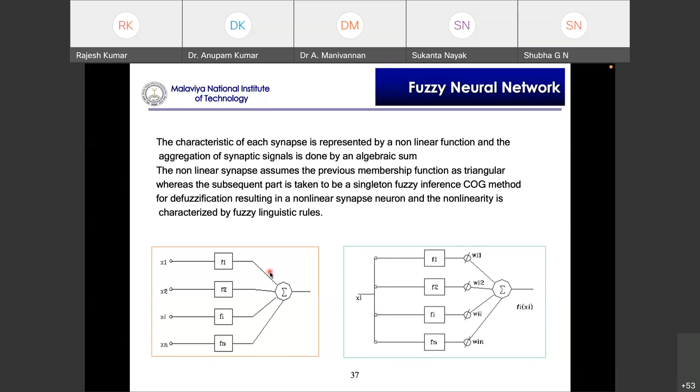And the controller, if you are processing in a control, that is known as fuzzy neural controller. So that is the important thing there, which falls in this category. In the second case, that is neural fuzzy inference system, the structure is something like this.

This structure is a bit different, whose nodes have different processing. It looks like a neural network kind of thing, but layer 1's job is doing fuzzification, layer 2 is rule based, layers 3, 4, 5 are defuzzification. We need to see how we are using these functions. In this case we have layers, each layer having a particular job: one layer does fuzzification, second develops the rule nodes, third does the normalization, another is consequence layers, and the summation layer, and likewise. If the things are made adaptive, we call it ANFIS, which is a very popular approach, and controllers using it are known as adaptive neuro fuzzy controllers.

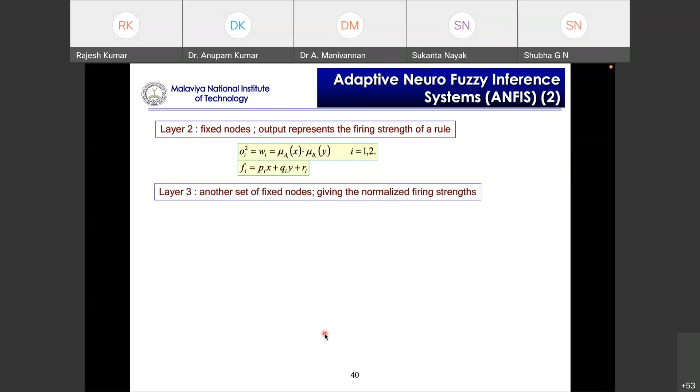Here layer 1 is your adaptive nodes, which is represented mathematically like this. Layer 2 they are fixed nodes. So you can see variable nodes and fixed nodes, with equations there. The output of the adaptive node: you give the value x and it will generate a membership function, so you can have it here. Then you have another node which is fixed, representing the firing strength of the rule. The third node is again a normalization node. The fourth node is an adaptive node which parameterizes the things.

And then fifth is again a fixed node which calculates the overall output of this thing. So this one is the structure of NFIS nodes.

We update the parameters using gradient descent, and if your problems are still very complex, you can think of updating weights using some other approach other than gradient, maybe modified gradient or fast gradient, or anything like that.

And then we use backward pass, forward pass, and all these things. I'm not going into the mathematics here. What is forward pass and backward pass? Forward pass and backward pass is nothing but the training, how you modify your weights there.

Again, the modification can be there. Going back to the figure here, let's skip a few things and go here. We are having fuzzification, so we can play with the membership functions here, or we can play with the scaling factors here. Then there are the rules.

Normally, since it is fixed, we cannot do anything here, but here we have again some kind of variability. So in backward pass, there is nothing like updating weights. What we update is their membership functions or their scaling factors.

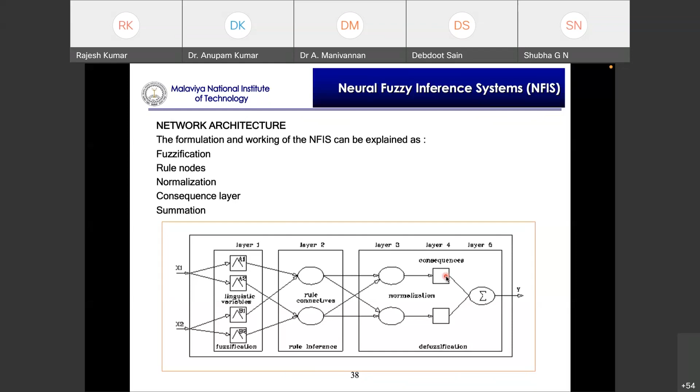So what we have done in adaptive fuzzy controllers, those things in a different form are being used here in neuro fuzzy controller. That's why we say adaptive nodes, we can do some changes here, in membership functions and their types and shapes and all this.

Fixed nodes are fixed, we cannot do much change there. Then another set of fixed nodes, we cannot do any change in backward pass either. Then the fourth layer is adaptive, where we can play with the parameters. And then the last node is fixed, we cannot make changes there.

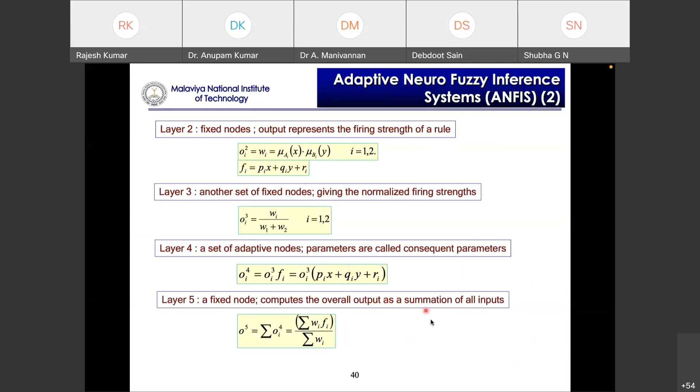So when we are doing back propagation, we cannot make any change in the fixed nodes. We only have 2-3 places where we have adaptive nodes where we can perform the changes. And what are the changes we can do?

All these are the same. You can change the width of the fuzzy set, you can change the shape of the fuzzy set, you can vary the position, you can make them symmetric, you can make them unsymmetric. So whatever we have discussed earlier, the same thing you can do in backward pass when we are talking about NFIS.

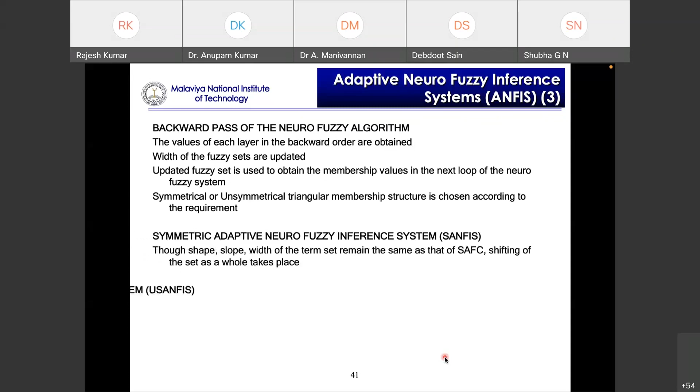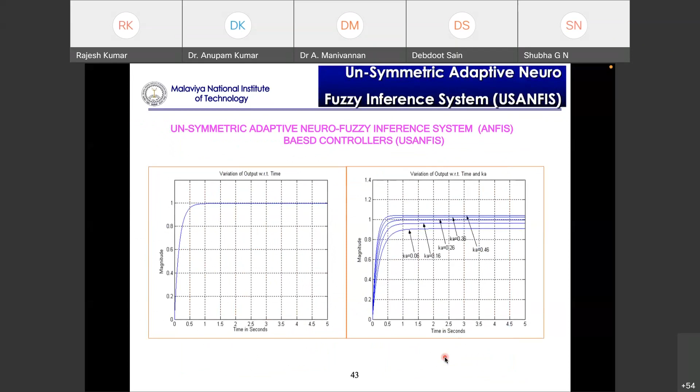So these are certain results obtained, like SANFIS, meaning symmetric, where membership functions are varied symmetrically. You can see the performance of the curve there. And unsymmetric means their shapes are controlled, their shapes are not fixed, they have a varied kind of structure.

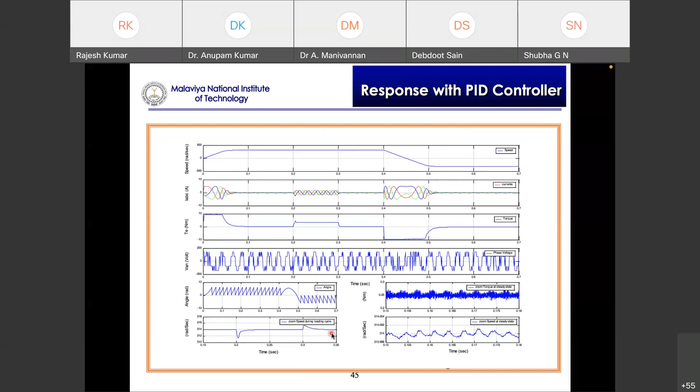If there is variation, your controller is good enough to bring it back so the machine recovers. This can be a drive rotating machine, a robotic machine, or something else — your case can be anything like that.

Now coming to the last section of this discussion, which is how you check the performance. One way is this: these are the various controllers I simulated for the same problem. We started with PI, then PID, self-tune, fuzzy tune, neural tune, genetic tune, slide mode, fuzzy PI, symmetrical, unsymmetrical, neural, and ANFIS, all the controllers. One thing to check is, at steady state, how much ripple there is.

You can see here that PID neural tuned is a poor performer, because we don't have enough accuracy in the data — maybe the neural network designed to tune my PID isn't good enough. Fuzzy is the most stable, as I told you, it gives very good results. The variations in speed are very small, almost constant.

Similarly, for unsymmetrical fuzzy inference, when I talk about torque ripple — slide mode has chattering kind of issues, and these are reflected in the torque, with the ripples being maximum in slide mode. They are best in your ANFIS, symmetric ANFIS.

So best means very less torque ripples. So this is how you can see your machine's physical properties behaving when you are using a certain controller. You need to see the transient response also.

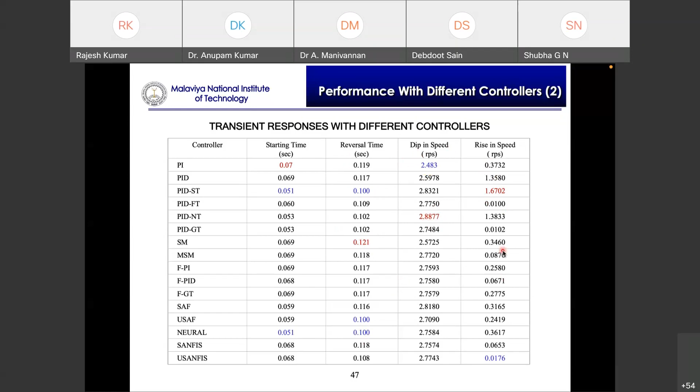So this gives me the performance if I would like to see what the transient effects are on my motor. Then there is another category, an extension on the transient response, and this one is very important. This one is from a control system point of view. These are the parameters which are very important.

Peak overshoot means if I give the value 1, how much it is going beyond that. Then peak time, how much time is taken by my motor to reach that particular value. Or take it as controlling my robotic arm with a motor, so if I give angle 30, overshoot is how much it goes beyond 30. Peak time is how much time it takes to reach that peak value. Rise time is basically my fast response, how fast I am reaching there. Settling time is the time required to settle, with no oscillation, a steady state.

Steady state error means if 30 is required, what is the final angle attained by that particular robotic arm. And these are the performance parameters: integral square of error, integral time absolute error, integral time square of error, integral absolute error, and another domain, summation of last 10 errors kind of structure.

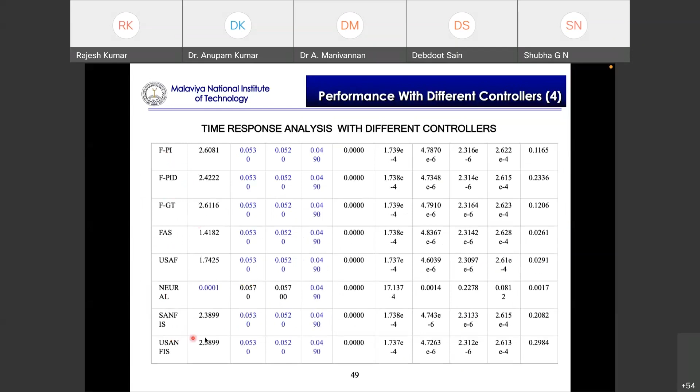So these are other categories like fuzzy categories and all these things. Which controller is good for my purpose, which one is giving less peak, faster response, less steady state error, and likewise. So from there we can conclude which controller can be used for my particular problem and all that.

So we can conclude in a simplified manner that intelligent PID controllers are easy to tune because it's a good combination of intelligence and conventional controller combinations. Sliding mode controllers are robust, but chattering issues are there. Fuzzy controllers are the next category, and that's why they are more robust and more popular, being used in cameras, washing machines, and everywhere. If there are tuning issues, they can be eliminated by making them adaptive, or you can use certain tuning approaches. And you can think of more hybrid controllers that can be designed and implemented for your problems.